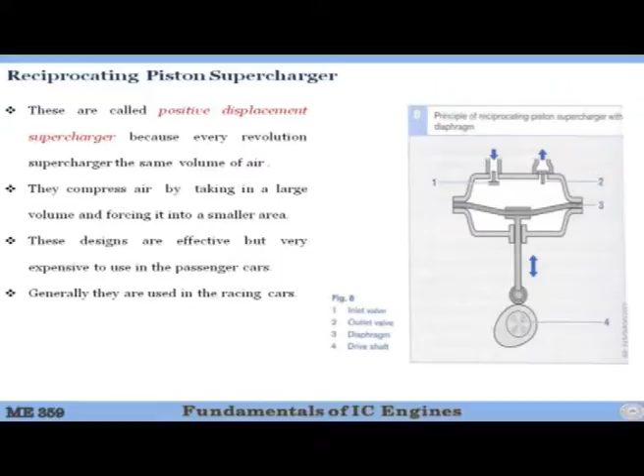Turbocharger or supercharger - then you have the reciprocating piston supercharger. There is a cam, a follower, and a flexible strip which can move up and down. When it moves down, vacuum is created and air comes in, and when it goes up, compression happens, pressure is generated, and this valve opens at a particular pressure and the air goes out.

This is also a positive displacement supercharger, because every revolution supercharges the same volume of air. They compress the air by taking in a large volume and forcing it into a small area.

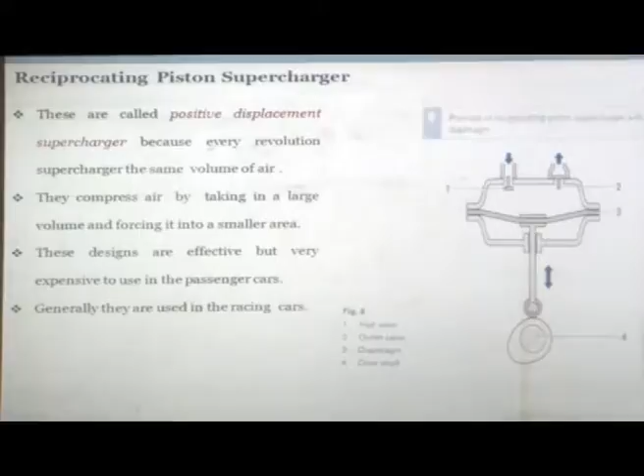These designs are effective but very expensive to use in passenger cars, so this kind of supercharger is generally used in racing cars, because in racing cars you don't worry about cost and you don't worry about life - as long as they last one race, you're okay, and they should do their job properly.

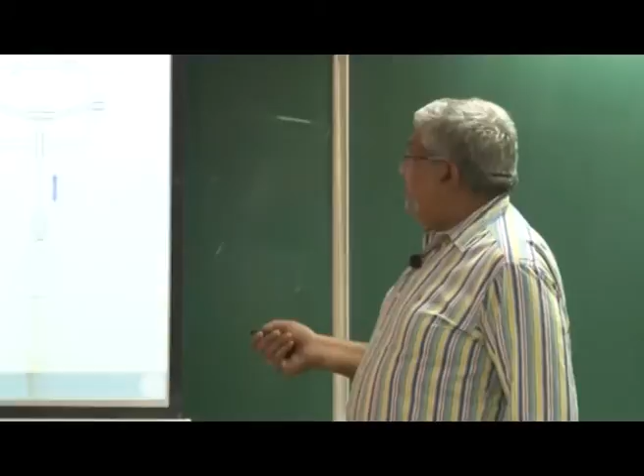But in a car which you want to own, you don't want any component to fail before the entire car fails. You want it to last something like 200-300,000 kilometers, and you don't want components to fail. So this is not a good supercharger for that kind of application, but for racing cars, yes, it's a good option.

The air is admitted at one end of the compressor and trapped between the helical rotors and the casing. The screw action of the rotor displaces the air axially. The Lysholm compressor produces a constant compression, and this compression is produced internally, unlike the Roots blower, where compression only occurs at the exhaust. So in the Roots blower, compression happens only at the opening, but here it is happening internally.

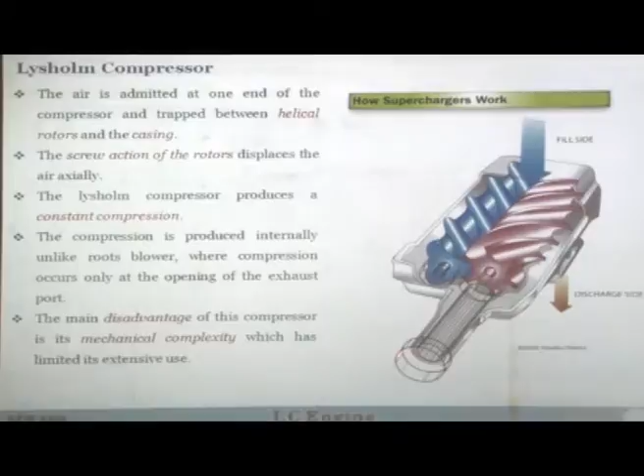The main disadvantage of this compressor is the mechanical complexity - it's not a very simple compressor. Because of the mechanical complexity, it has very limited use and is not used very extensively. Nevertheless, it is also one option available to you if you can handle the complexity.

The idea is that when the air is taken in, this air will be compressed between the outer casing, the inner casing, this vane and this vane. It will not allow leakage.

If the air comes in, right now this inlet port is open. So there is a lot of volume, then it moves and some compression happens, then more compression happens, and when more compression happens, higher pressure will be generated, and this high pressure air will go out, and then expansion starts, and then again you take in more air.

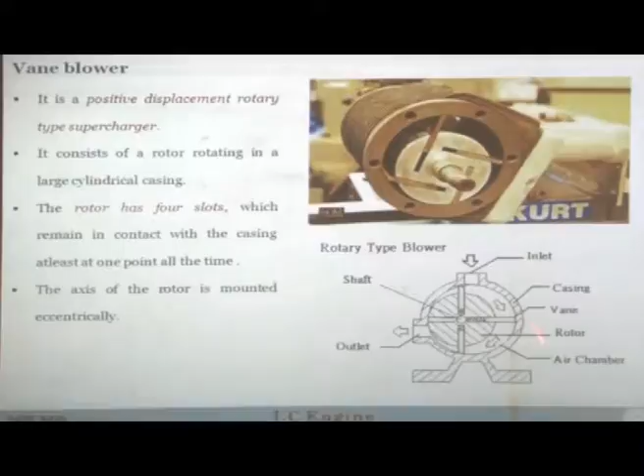So this is also a positive displacement rotary type compressor. It consists of a rotor rotating in a large cylindrical casing, and you can see that the axis of this outer cylinder and this rotor are not the same - it is eccentric. If it were in the center, then it would not do any compression.

The rotor has 4 slots - it is not necessary to have 4, you can have more if you want, but generally it has 4, which remain in contact with the casing at least one point at a time. So this entire length, there will be a line which will maintain contact. The axis of the rotor is mounted eccentrically.

So this is how the rotary type blower, or rotary type supercharger, actually works. This can also be bolted on.

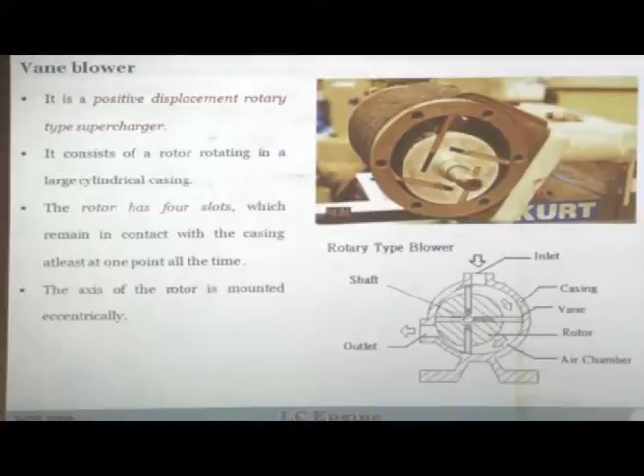The centrifugal compressors run at very high speed. So if you are using a low speed engine and you want a centrifugal compressor, that compressor will be operating at 10 to 15,000 RPM. And if you want a compressor for a high speed engine, you need 15 to 30,000 RPM.

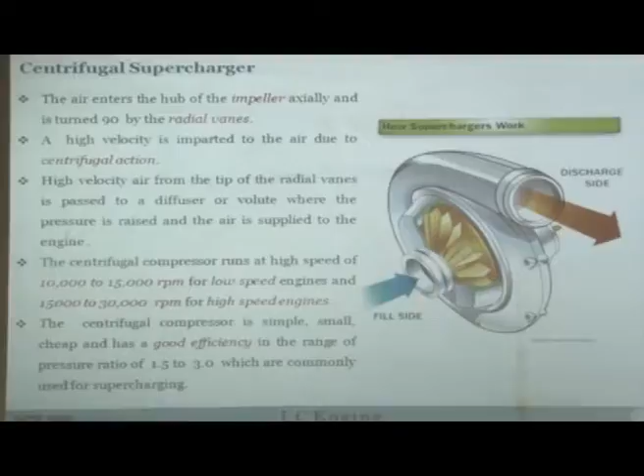Can you tell me what will be the speed of a typical turbocharger, automotive size turbocharger? Close to 1 lakh. That's right. So it could operate anywhere between 50,000 RPM to 2 lakh RPM, depending on what is the load and speed, and depending on how much exhaust gas is flowing through it.

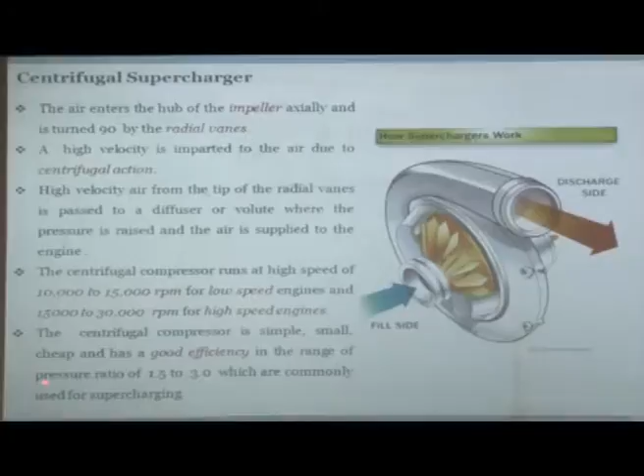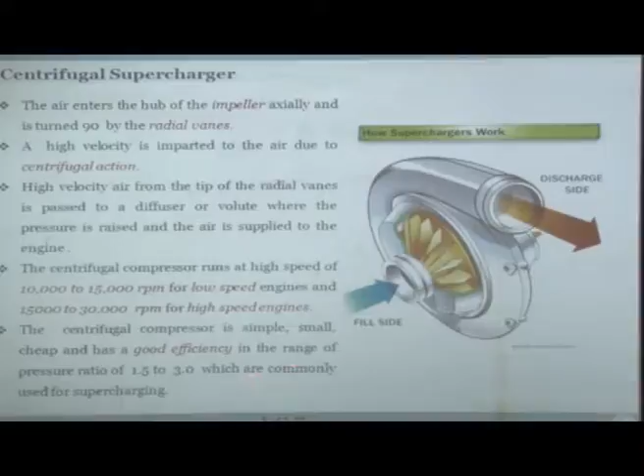So the centrifugal compressor is simple, small, cheap, and has reasonably good efficiency in the range of pressure ratio from 1.5 to 3. Pressure ratio means outlet pressure by inlet pressure, which are commonly used for supercharging. So this is quite suitable.

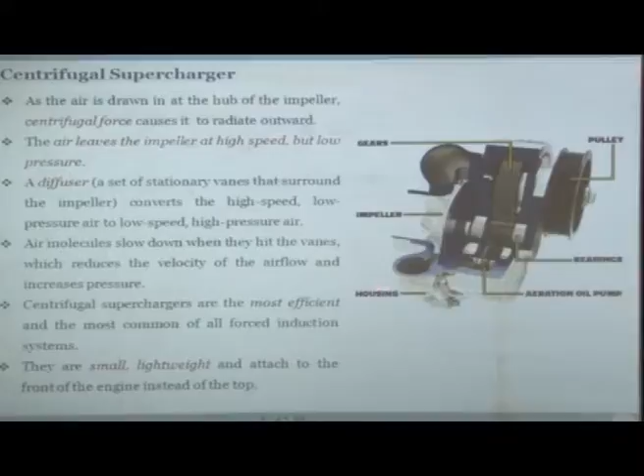So this is how a centrifugal compressor looks like, a centrifugal supercharger looks like. There will be a pulley, which will be connected by a belt drive to the engine crankshaft. Then there will be some gears, because you have to operate it at very high RPM, up to 30,000 RPM. The engine crankshaft will be rotating at 1 to 3,000 RPM maximum, 5,000 RPM.

So the RPM has to be increased, and that is done by this appropriate gearing mechanism. Then there is the impeller, and there is a housing, and then there is lubrication also, because everything needs to be lubricated since it is rotating at a very fast speed.

So the air is drawn into the hub of the impeller by centrifugal forces. The air leaves the impeller at high speeds. The diffuser converts high speed low pressure air into low speed high pressure air. Air molecules slow down when they hit the vanes, which reduces the velocity of the airflow and increases the pressure.

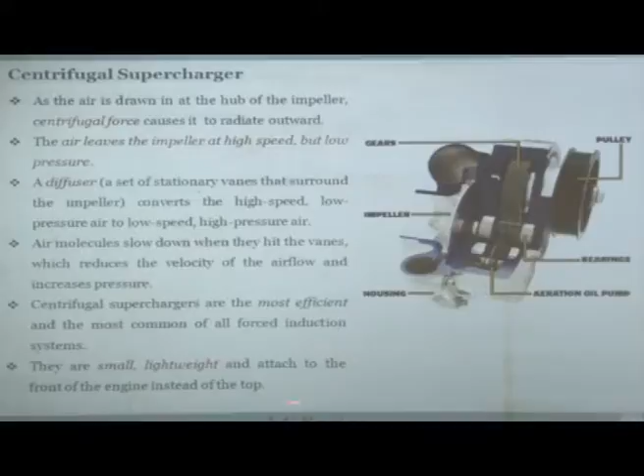Centrifugal superchargers are the most efficient and most commonly used forced induction systems, particularly for engine applications. They are small, lightweight, and attached to the front of the engine instead of on top. So it's very easy to attach on the front of the engine where the crankshaft is. So this is how the centrifugal supercharger works.

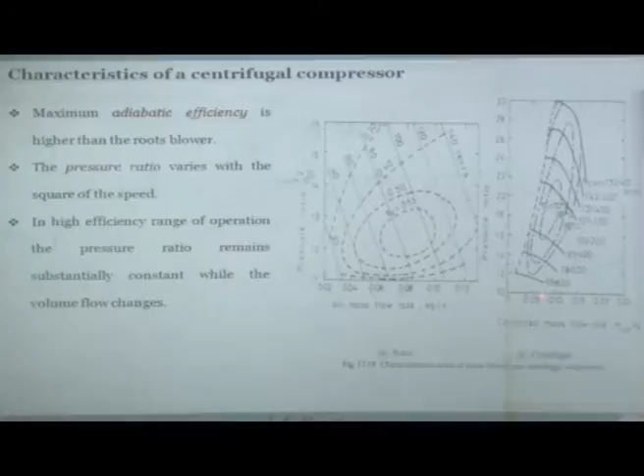So if you are within this envelope, you are at 55% efficiency. Within this envelope, 50%. Larger you go, 40%, 30% and like that. Here this is 80%, 68%, 65%, okay, and these are the speeds and this is the pressure ratio.

So this is exactly opposite to the positive displacement compressor, in which volume flow remains substantially constant, but pressure ratio changes rapidly. This makes centrifugal compressors unattractive for automotive applications. So centrifugal compressors are not very suitable for automotive applications.

The limited speed range of the compressor makes it suitable for constant speed type engines. So centrifugal compressors are more suitable for say genset engines, where speed is not changing, or for aircraft engines. So these are suitable for those applications, but not for variable speed engines, because they don't like frequent changes in the speed.

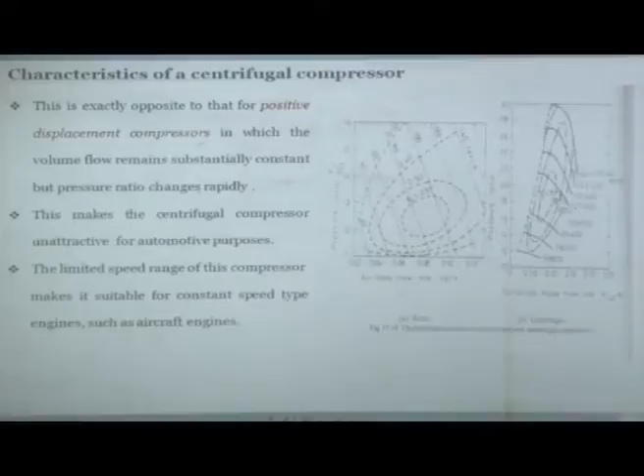Let's look at the effect of supercharging on the performance of the engine. What happens to the power output?

The power output of a supercharged engine is higher than its naturally aspirated counterpart due to the following reasons. First, the amount of air inducted per cycle at a given swept volume increases. So you have more air, so you can put in more amount of fuel.

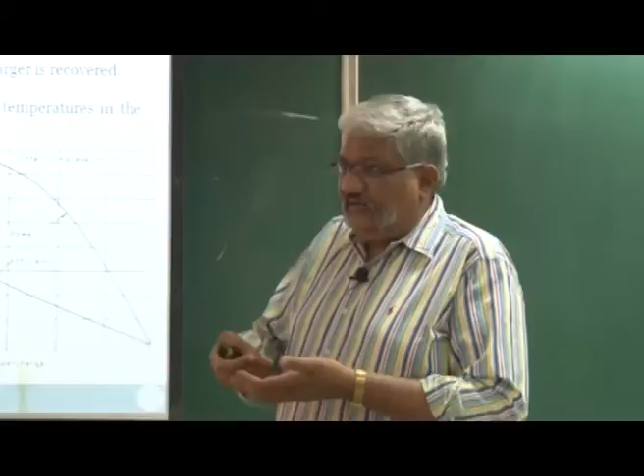Second, during the gas exchange process, some of the work done on the supercharger is recovered. In gas exchange, during the exhaust, the piston is pushing and you have to provide extra power to push the piston, and then exhaust goes out. Now the fresh air comes in and you have to suck it. In the naturally aspirated condition, the piston has to be forced by the power of the engine itself, but when you have a turbocharger, the air is also at a higher pressure, so air will start working during the intake stroke as well. That is why part of the work that you are doing in compression is recovered in the intake stroke, or gas exchange process, as we call it.

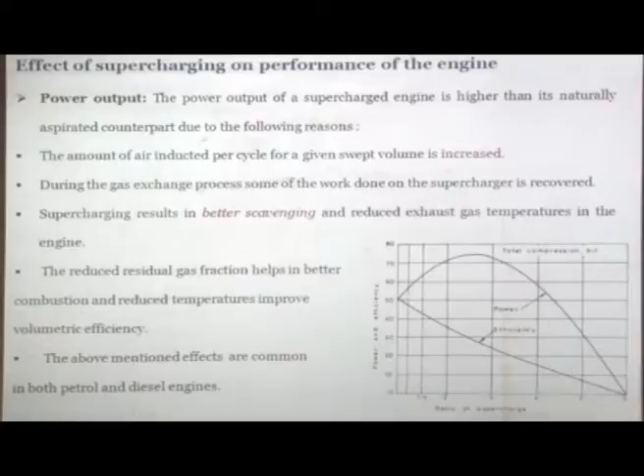Supercharging results in better scavenging. Scavenging is basically forcing out the exhaust by the fresh air when there is valve overlap, which always exists to some degree in the engine. When fresh air is coming at a higher pressure, it will flush out more residual gases, so you will have less residual gases left in the engine, cleaning most of the burned gases. This results in better scavenging, and reduces exhaust gas temperature, because the intake temperature will be lower since most of the hot exhaust gases have been removed from the combustion chamber. Everything cools down better, leading to lower exhaust gas temperature.

The reduced residual gas fraction helps in better combustion. These exhaust gases left at the end of combustion are contaminants that affect combustion adversely. With lower quantity due to increased intake pressure, you get better combustion, reduced temperature, and improved volumetric efficiency, since hot gases have higher volume for the same mass, which reduces volumetric efficiency.

These above mentioned effects are common for both petrol and diesel engines. So power output actually increases with turbocharging.

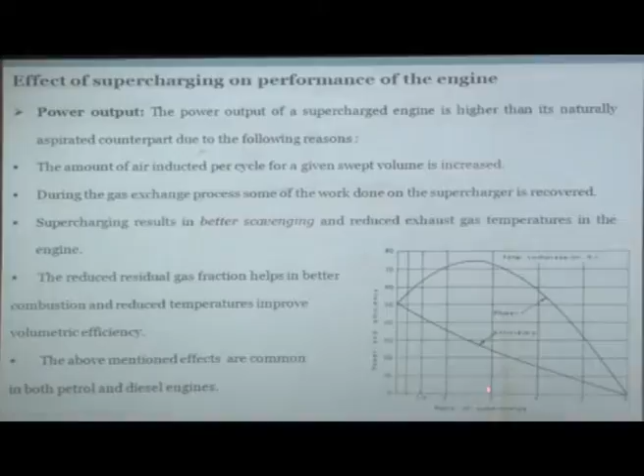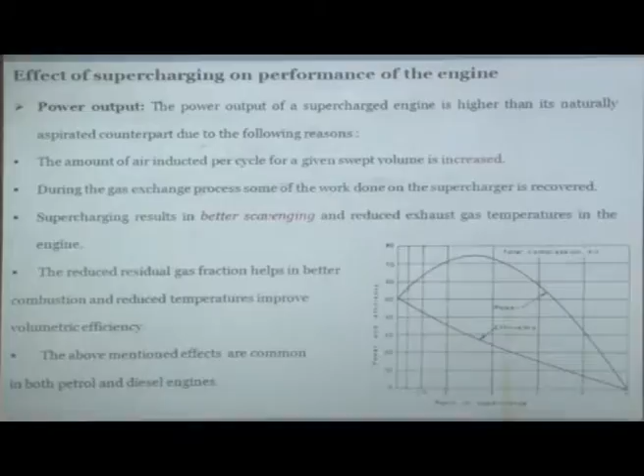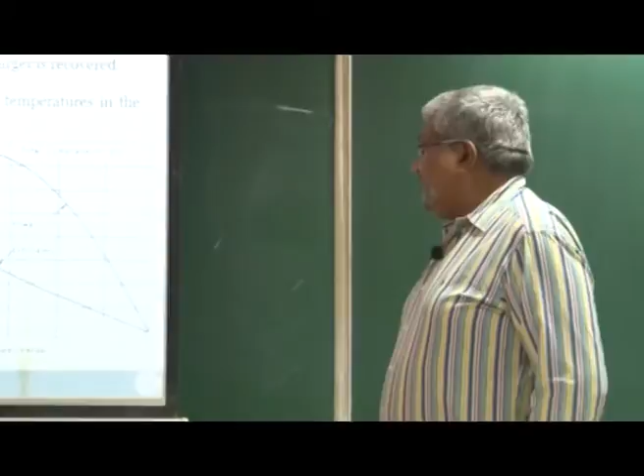You don't go beyond a certain ratio of supercharge - the boosting is never more than 1.5 to 2 bars. Beyond that, it becomes counterproductive. There is a good possibility that if you boost beyond 2 bar, you may end up damaging your engine, because boosting is almost like increasing the effective compression ratio of the engine. This affects the structural integrity of the engine as well, and sometimes there may be a possibility of breaking.

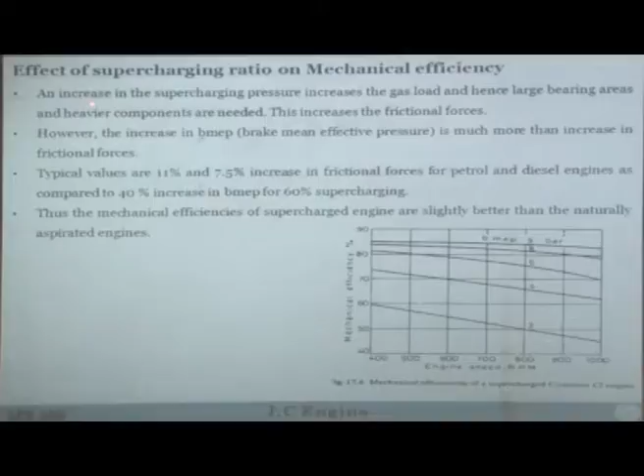What is the effect of supercharging on mechanical efficiency? Increasing supercharging pressure increases the gas load, hence larger bearing area and heavier components are required. When you are boosting the engine, you are putting in more fuel, so the peak firing pressures and rate of heat release will be higher. So everything has to be strong - the piston, the connecting rod, the bearings, the crankshaft - and this also increases the frictional loss.

Therefore, in an unmodified engine, if you do not want to change the piston, connecting rod, or anything, you should know what is your factor of safety.

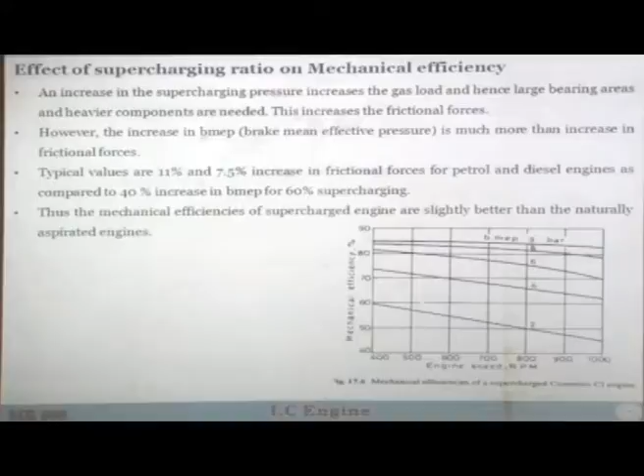In the engine, we take a reasonable factor of safety, and when we boost the engine, we are still within safe limits. But if you boost it beyond a certain level, there is a possibility you may exceed the factor of safety, leading to a warped connecting rod, distorted crankshaft, piston failure, piston disintegration, cylinder disintegration, or snapped head bolts. So many problems can happen if you boost your engine above 2 or 3 bar.

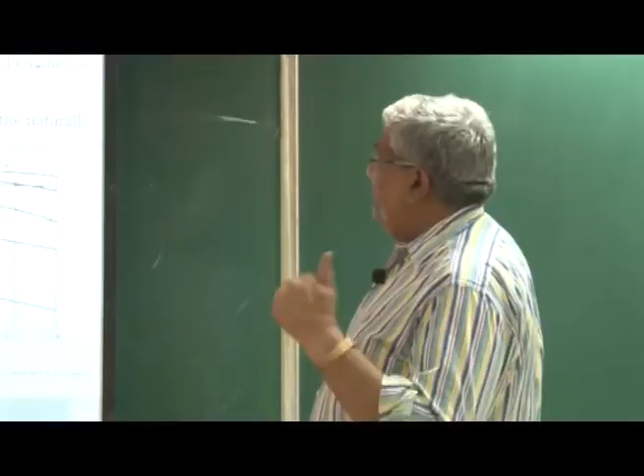This certainly increases frictional loss as well, since the pressure in the cylinder increases. However, the increase in BMEP is much more than the increase in frictional loss. BMEP means the power output is more. So since the power output is more, although frictional loss is increased, since that is what you want, you ignore the loss.

The negative aspect is not overbearing on the positive aspect. The positive aspect is increase in BMEP or increase in power output, so that is quite attractive. Typical values show 11% to 7.5% increase in frictional loss for petrol and diesel engines by boosting, compared to a 40% increase in BMEP. So 40-50% more power you can generate, and frictional forces will increase by only 10-15%.

So the mechanical efficiency of a supercharged engine is slightly better than a naturally aspirated engine. Here this shows engine speed in RPM, mechanical efficiency, and BMEP. You can see that when the BMEP is low, the engine is operating at low load. As you keep increasing the load, your BMEP actually increases, so mechanical efficiency which was between 60% to 45% now increases to 90% to 75%.

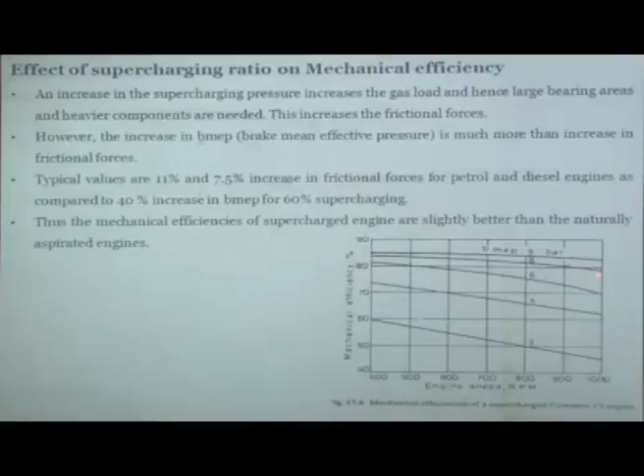So this is all that I have to talk about supercharging. If everything is clear, then we can move on to turbocharging. So let us start turbocharging.

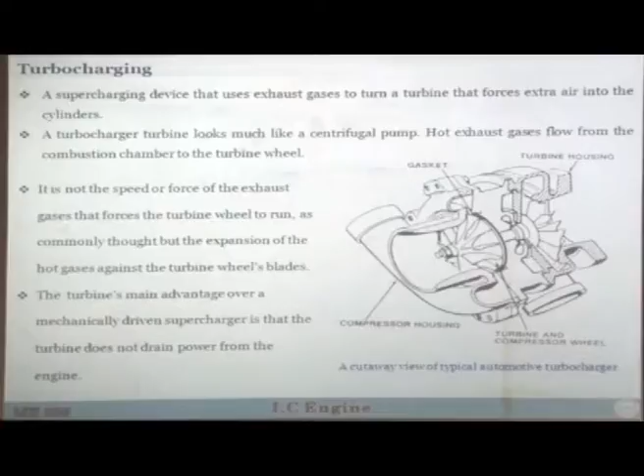Turbocharging is also some kind of supercharging device, but the only difference from supercharging is that it does not draw power from the engine crankshaft, it draws power from the hot exhaust gases. So it is a charging device that uses the exhaust gases to turn the turbine, which forces extra air into the cylinder, into the intake manifold.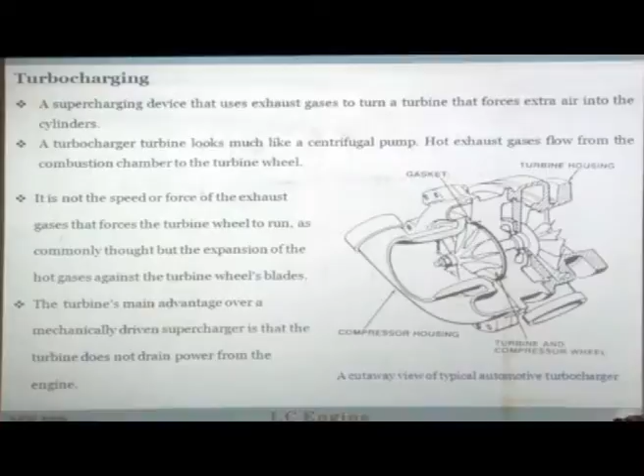A turbocharger turbine looks more like a centrifugal pump. It is just like a centrifugal pump, the only thing is the flow direction is exactly reverse. What does a centrifugal pump do? It takes atmospheric pressure air, uses work to give it kinetic energy, and what comes out is high pressure, high temperature air. Temperature also increases because compression is taking place.

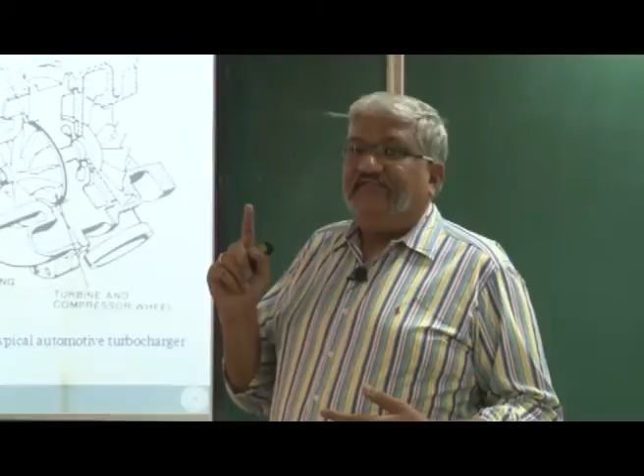A turbine does exactly the opposite. It takes high pressure, high temperature exhaust gas in, generates power, and lets low temperature, low pressure exhaust gas go out. So it's just the reverse. If you look at the mechanical construction also, it is pretty much similar, except the flow directions are opposite of each other.

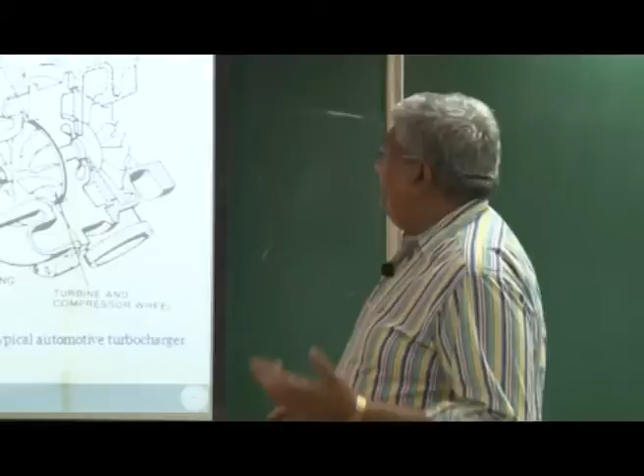A turbocharger looks much like a centrifugal pump; hot exhaust gases flow from the combustion chamber to the turbine. So this is a typical turbocharger. Please see, this is the compressor housing and this is the turbine housing, very compact, and both are connected by a shaft. So when the exhaust gas goes in from here,

it rotates, and first this diffuser will act as a nozzle. So whatever pressure and heat you have, it will increase the velocity of the exhaust gas, and then it passes through this impeller where there is further expansion, and the kinetic energy of the exhaust gases is imparted to the impeller. So the impeller starts rotating and the shaft starts rotating, and this shaft is connected to the compressor, so the compressor impeller also starts rotating, and air goes in from here, fresh air is given kinetic energy, and it goes out at a higher pressure. That is the working mechanism.

So here you have to understand that it is not the speed or force of the exhaust gases, but it is the heat.

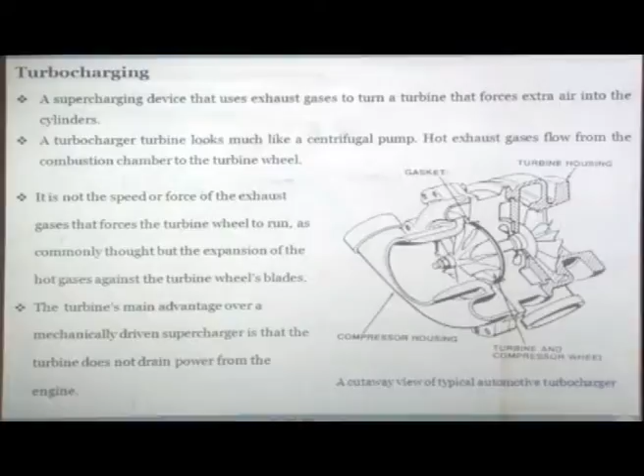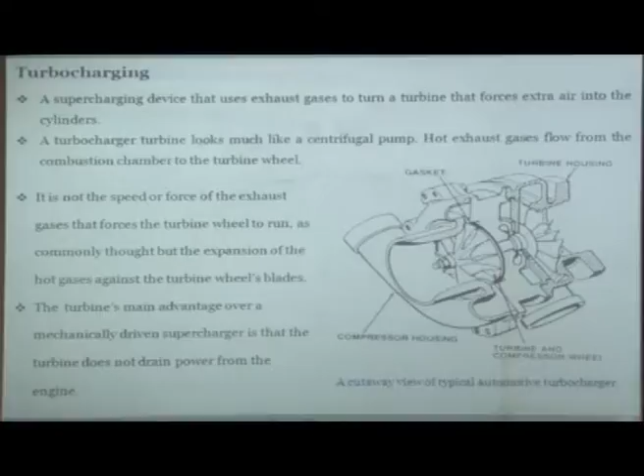Exhaust gases coming out of the engine are hot, their temperature could be as high as 250 to 650, 700 degrees, in case of an SI engine it could be even 800 degrees centigrade. So these are very hot gases, pressure may not be very high. These gases expand in the turbine stage, and the turbine starts rotating. The turbine's main advantage over a mechanically driven supercharger is that it does not drain power output from the shaft of the engine. So it is almost free of cost because exhaust gas was going waste anyway. You have used that energy to run your compressor, so it is a very positive aspect.

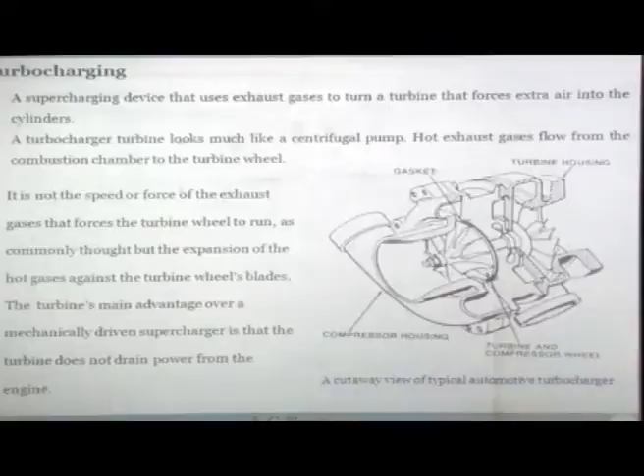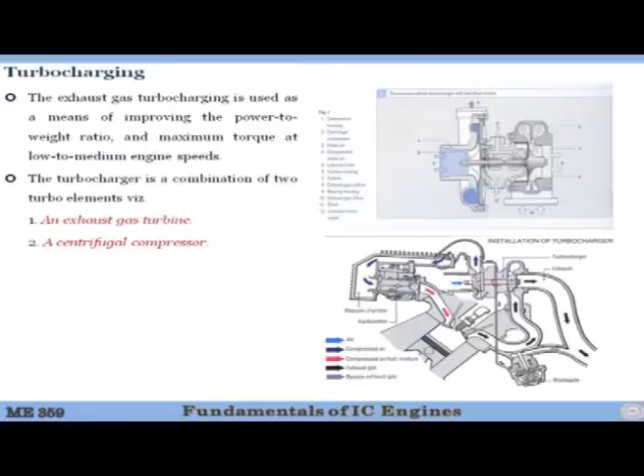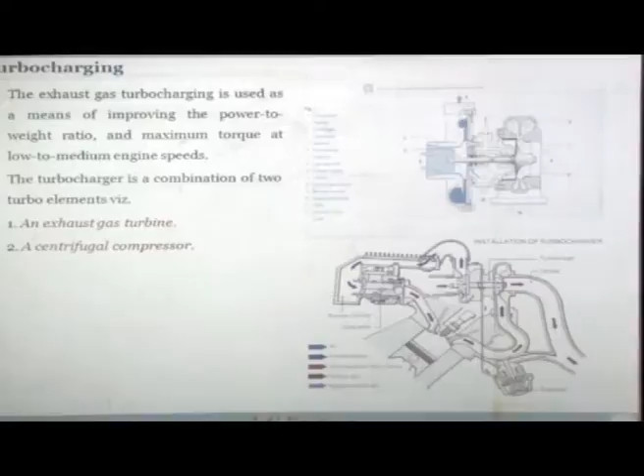So this is again the same cut section, you can see this is the compressor, and here you can see this is the impeller, and these are the diffuser, circular diffuser, and this is the turbine. Exhaust is going in from here, and you can see these are the nozzles, and then the exhaust passes through this component where it delivers its momentum, and then the gases go out, and this starts rotating, which in turn rotates this.

So exhaust gas turbocharging is used as a means of improving the power to weight ratio and maximum torque at low to medium engine speeds, and the turbocharger is a combination of two turbo elements, one is the exhaust gas turbine, the other one is the centrifugal compressor.

This is the installation of a turbocharger on a typical engine, a spark ignition engine as you can see. This is the piston, this is the spark plug, this is the intake air, this is the exhaust gas, and this is the exhaust manifold. Here you have a waste gate, which bypasses some of the exhaust when required, otherwise in normal condition it remains closed. So when it remains closed, all the exhaust passes through this turbine and goes out, and ultimately the waste gate and turbine both exit into the same exhaust pipe.

This starts rotating, and then the intake air is taken in from the atmosphere. Obviously before this point you will have a filter, you do not want particles to enter. So the intake air comes, this is rotating, power is coming from the turbine. Compression happens, and because of the compression, the pressure and temperature both increase. Now when you have high temperature air going into your system, volumetric efficiency will reduce. So you do not want hot air to go in, you would like to cool it so that your volumetric efficiency increases.

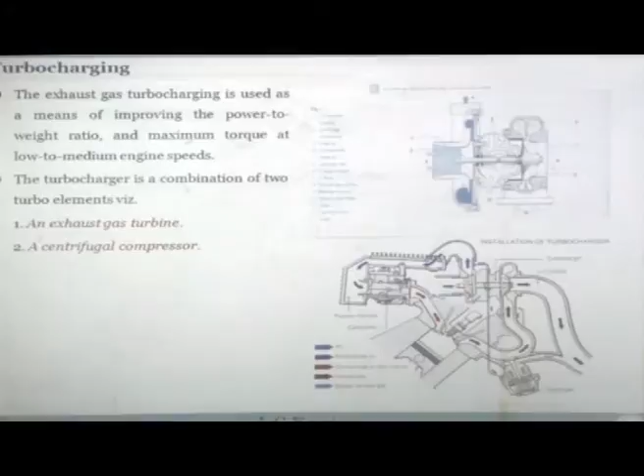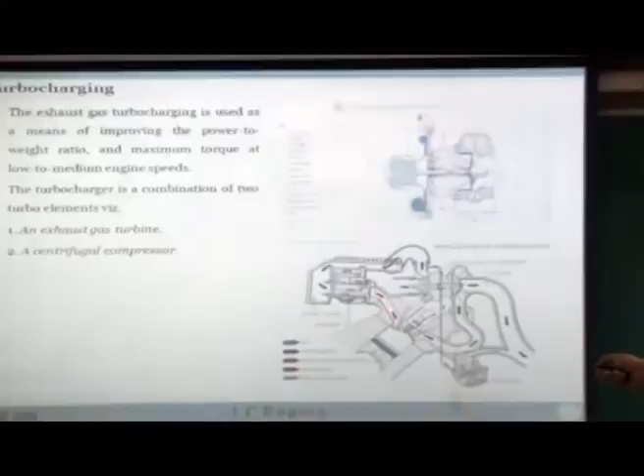So this high pressure, high temperature air passes through some kind of cooling device, an intercooler or some device. You can see some fins here. So this is high pressure, now it is room temperature, high pressure air. Then it passes through a very special type of carburetor, one which can withstand and work in high pressure. Or nowadays nobody uses carburetors, especially for four-wheeler applications, so that thing is gone, and in its place you have a port fuel injector. So that fuel air mixture comes in, and this is how it is installed.

So here's another view, you can see the exhaust gas entering, rotating through the turbine and going out axially, and ambient air entering axially, rotating, and high pressure air going out.

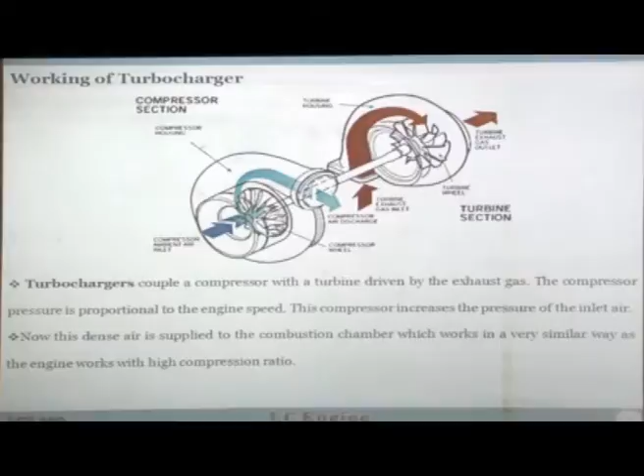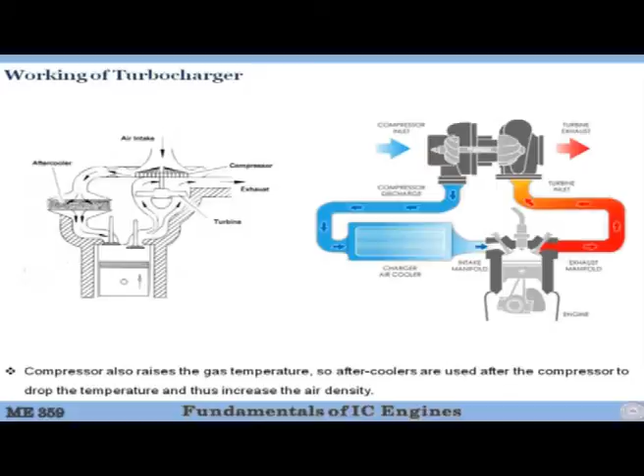So here you take the air in, and then you have to pass it through some kind of charge cooler in order to reduce its temperature. Rest of the things I have already explained to you. The compressor also raises the gas temperature, and therefore an aftercooler or some kind of intercooler is required, basically some kind of heat exchanger where, without changing the pressure, you are removing the heat and cooling the intake air. So after the compressor, to drop the temperature, and this will help increase the density.

Now, if you are using a turbocharger or a supercharger, which one will have a faster response, and why? Obviously the supercharger will have a fast response because it is connected to the crankshaft. The moment you demand, the engine starts rotating fast and boost is provided almost instantaneously because it is bolted on. In a turbocharger, what happens is the engine starts rotating fast, you demand more fuel, but there may not be enough air to begin with, so it tries to catch up. There will be more exhaust which will be hotter, going to the turbine. The turbine starts rotating faster, which then leads to more boost in the compressor, more pressure generation, passing through the intercooler and then coming in.

So for this pressure difference, the pressure wave takes time, there is a circuit. So during this time you are putting more amount of fuel and there is not enough air. So there is a lag in the response, and this creates a big problem. This is called turbo lag.

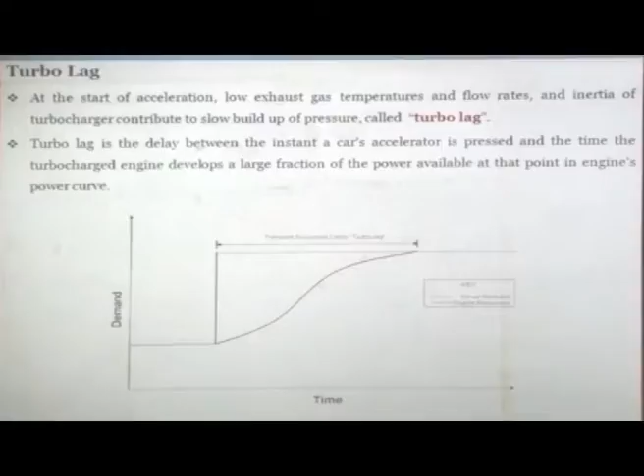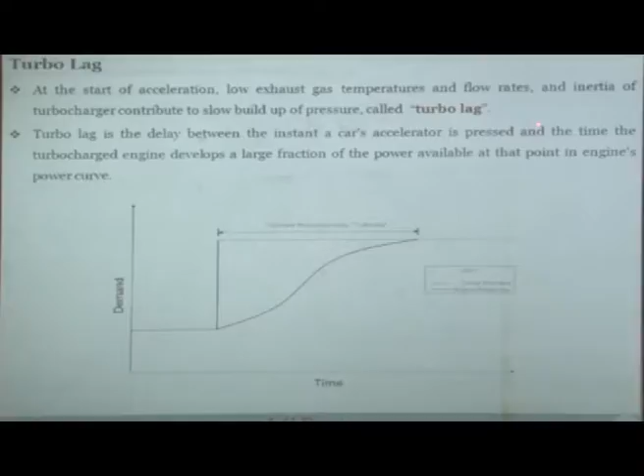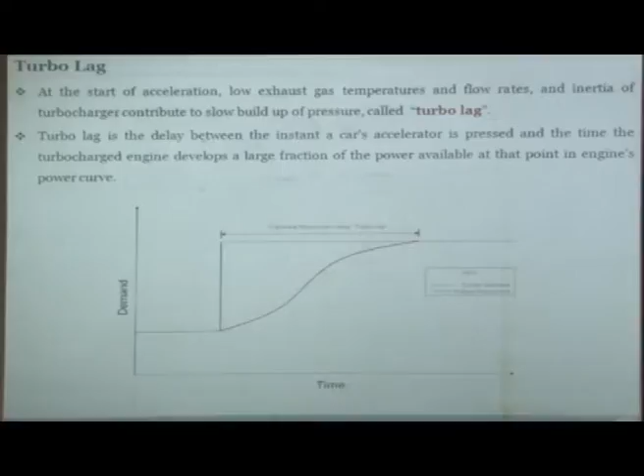As soon as you have more exhaust going, the turbine will take its time to increase its rotational speed and build pressure, and that is what creates this turbo lag. Turbo lag is the delay between the instant a car's accelerator is pressed and the time the turbocharged engine develops a large fraction of the power available at that point on the engine's power curve. So basically turbo lag is nothing but the time delay between the moment the demand is placed and the moment the demand is met by the engine. That is called turbo lag.

I am sure you must have all travelled by train, and I am sure all of you must have noticed that when a diesel engine comes into the platform, and sometimes when it falls short and the driver tries to put the pedal, you see a large black smoke plume rising from the locomotive and you feel how bad it is. Have you seen that scenario? Most of the time it happens.

Why does it happen? Because of the turbo lag. And the moment the driver keeps on pressing, in 20-30 seconds that plume vanishes. After that it is just clean. It is because of the turbo lag.

That's the time when, suppose the locomotive driver pulls the notch, that means he starts giving more amount of fuel. So there is not enough air, and the hot gases also take time to reach the turbine. The turbine takes its own sweet time to accelerate and increase its rotational speed, and then again the intake air has to be supplied back to the engine. All this circuit is 20-30 seconds in a locomotive, and this is called turbo lag, because even the turbine and compressor have their own inertia. So it is just one example.

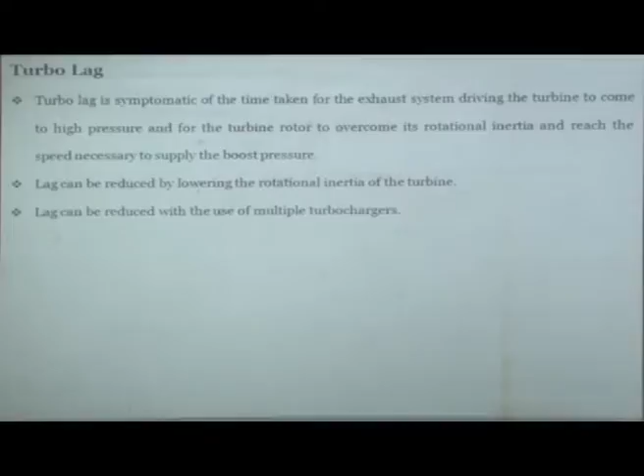It does not happen in case of a supercharged engine. Turbo lag is symptomatic of the time taken by the exhaust system driving the turbine to come to high pressure and for the turbine rotor to overcome its rotational inertia and reach the speed necessary to supply the boost pressure. This lag can be reduced by lowering the rotational inertia of the system. So how can you handle this?

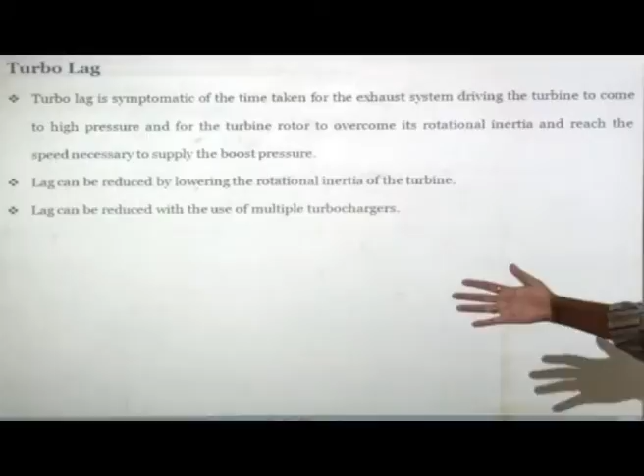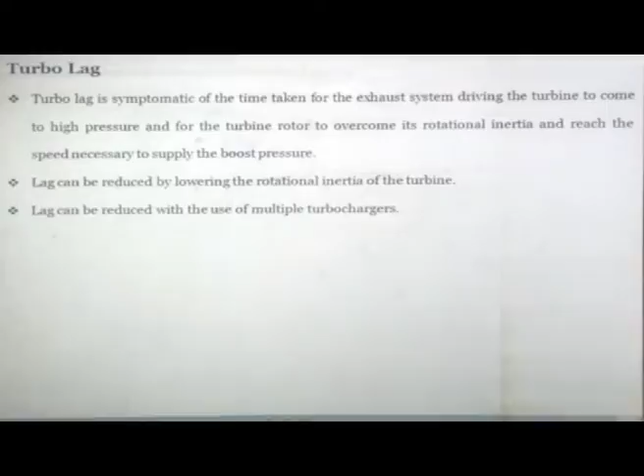Simple thing, instead of having such a big turbine, you have two smaller turbines. The lower mass you have, the lower will be the inertia. So you can have low inertia turbines, more number of them. So this lag can be reduced by use of multiple turbochargers. But multiple turbochargers also have their own problems, because earlier you had to maintain only one turbocharger, now you have to maintain two. So nothing is free, everything has some flip side.

Now let us look at overloading of the engine by the turbocharger. So you see we have defined the boost, and boost is the pressure above the atmospheric pressure that is coming out of the compressor. Now under some conditions you may not require very high boost. Boost will depend on the engine's operating condition. In some conditions you may require 0.2 bar boost, in some conditions 0.4 bar boost, in some conditions 0.6 bar boost.

So since you need variable boost, you need some mechanism by which you can control it effectively. So the process of controlling the maximum boost pressure of a turbocharger is known as boost control. The question comes, why is boost control essential, why is it required. First, boosting essentially means increasing the effective compression ratio of the engine. Now remember, in the context of spark ignition engines, if you have high compression ratio, what can happen? Knocking can happen. So higher compression of fuel air mixture may lead to knocking in SI engines.

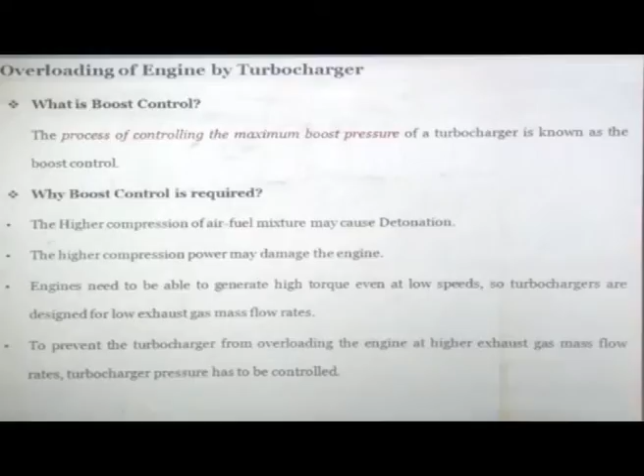Now, there are two things: a turbine and a compressor, connected by one shaft. Your objective is that the compressor boost should be reduced. So what are your options? One option is that the exhaust gas coming in, I allow some exhaust gas not to pass through the turbine, I bypass it. The other option is I allow all the exhaust to pass through it, let it rotate at whatever speed it is rotating, let the compressor generate all the pressure it has, and then I do not allow all the pressure to go into my intake. I allow only what is required, and send the rest back to the atmosphere. And this I can do for a diesel engine. If I am compressing air fuel mixture, I cannot do that in case of an SI engine, right.

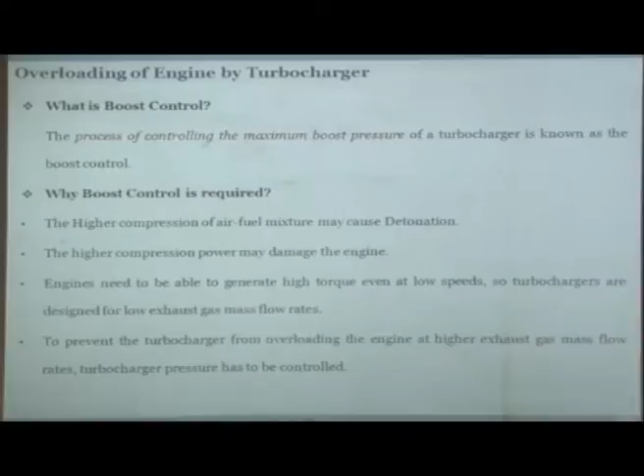On a very high level, these are the two main options you have, and for these you have some devices that you can use for boost control. Boost control is extremely important. Without boost control, there is no point in having a turbocharged system in an engine.

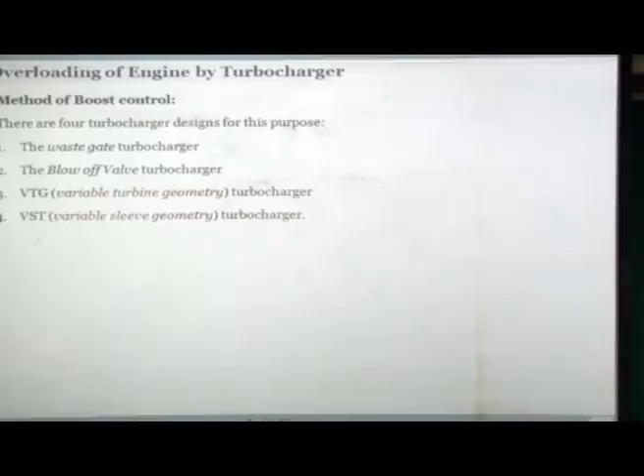4 turbocharger designs are used for this purpose, or 4 devices could be used for this purpose. One is the wastegate turbocharger, I will tell you what the wastegate is, I mentioned earlier also that there is a wastegate. Then there is a blow off valve turbocharger. And there is variable turbine geometry and variable sleeve geometry, VTG and VST turbochargers. Out of these, first 3 are most important.

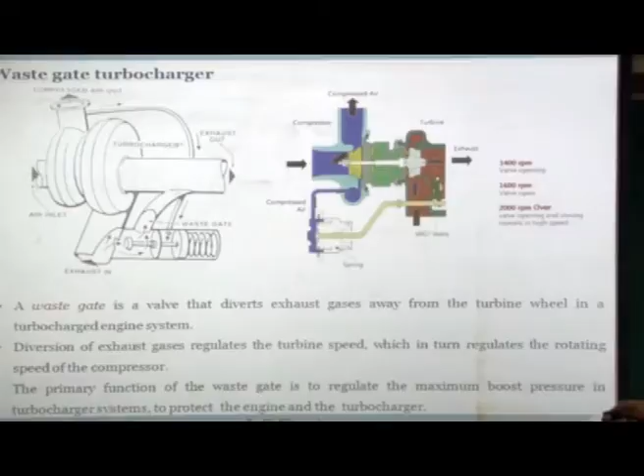What is a wastegate turbocharger? This is the compressor and this is the turbine. What the wastegate does is that it bypasses some of the exhaust. This is the entry of the exhaust gas. It bypasses some of the exhaust and puts it in the exhaust pipe, so it does not allow all the exhaust to pass through the turbine. Since it does not allow all the exhaust to pass through the turbine, the turbine speed will reduce, and therefore your boost will also reduce, or you can control it. And how do you achieve that? Basically this is the wastegate, a very interesting, very simple system. There is a spring here, and there is a pipe connected from the outlet of the compressor to here. Suppose this boost increases beyond a certain level, so the pressure here will increase beyond a certain level. This disc is fixed, so when the pressure here increases, then what will happen?

This piston will move to this side, and when it moves, this hole will be uncovered. The exhaust gas would like to pass through the path of least resistance, and there is resistance in the turbine, so it bypasses through this hole. Depending on how much the hole is open, that much exhaust gas will bypass. If the pressure is too high, the gate will open more and more. The moment the turbocharger speed reduces, boost will also reduce, so the pressure will reduce, and the spring will push it back and close it. This is an automatic system, isn't it smart? That is how it works.

This is another example, same wastegate, just a different cross section, more of a schematic cut section. Air is coming in through the compressor. From here a line is taken, with a spring and some mechanism - this is the wastegate. When the pressure is high, you open this device, and part of the exhaust bypasses - you can see the arrows showing the exhaust being bypassed. When the pressure falls, the turbine speed reduces, the compressor speed reduces, and this pressure falls, so this closes, and more of the exhaust passes through the turbine.

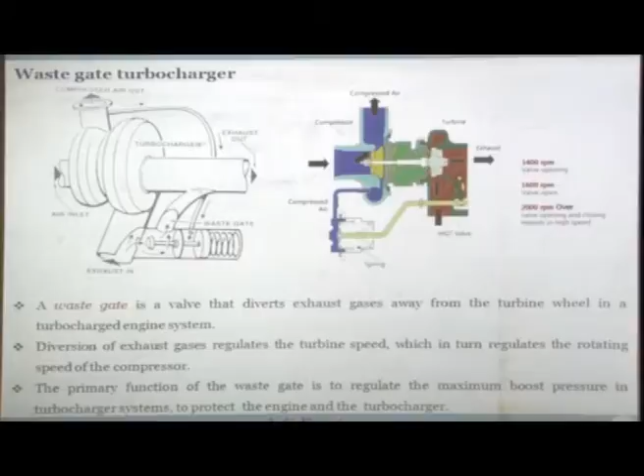At higher engine speeds or load, part of the exhaust gas is diverted by a bypass valve called the wastegate, shown here. This is the compressor, this is the turbine, and this is the valve. The moment it experiences higher pressure here, this valve opens and part of the exhaust gases go out, reducing exhaust gas passing through the turbine and lowering the exhaust back pressure, preventing excessive turbocharger speed. At low engine speeds and loads, the wastegate closes and the entire exhaust gas passes through and drives the turbine, generating sufficient boost. At high speeds, it opens and some exhaust is bypassed so that boost is controlled. That is how it works.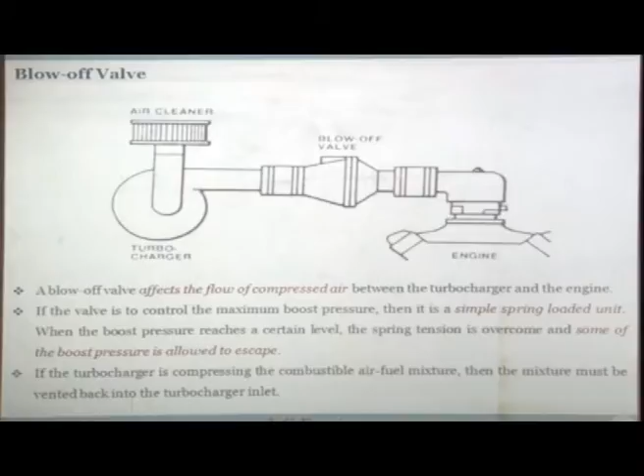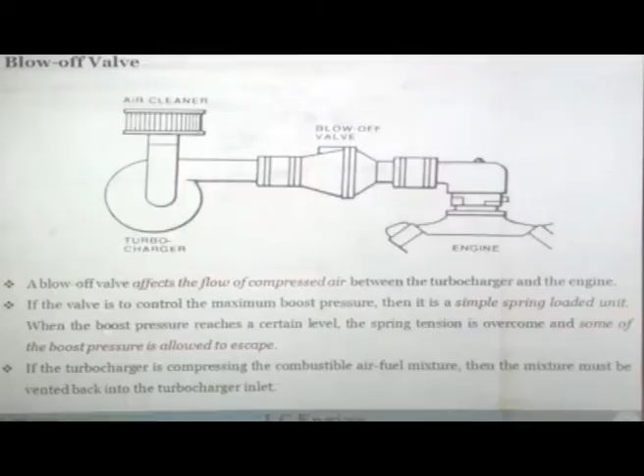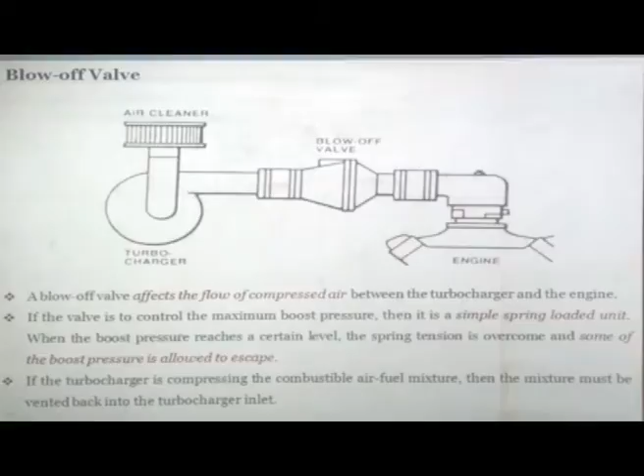If the valve is to control the maximum boost pressure, it's a simple spring loaded unit. When the boost pressure reaches a certain level, the spring tension is overcome and some boost pressure is allowed to escape. If the turbocharger is compressing a combustible mixture - suppose you have a carburetor and are compressing a fuel-air mixture - you can't allow this to vent into the atmosphere, so you have to put it back into the intake. If compressing a combustible air-fuel mixture, the mixture must be vented back into the inlet of the turbocharger - you have to make sure of that. If it's just a diesel engine, or just compressing air, you don't care to take that air back - it's free of cost. But if it's carrying fuel along with it, then it's not free, you have to plow it back into the system. So, this is how a typical blow off valve looks.

So, blow off valve, also called diverter or bypass valve, all work by detecting vacuum. Having done so, they use vacuum to mechanically open a valve in order to relieve unnecessary boost from the other side of the throttle plate. This is common in high performance applications where it provides the least compromise. They basically release the pressure straight into the atmosphere.

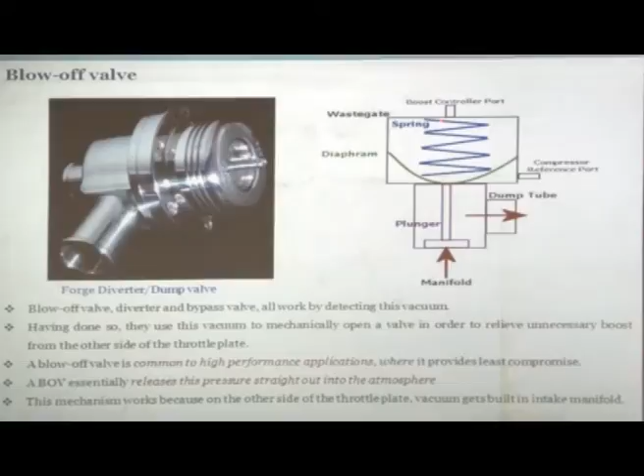This mechanism works because only on the other side of the throttle plate does vacuum get built up in the intake manifold. So there is a spring, a diaphragm, and a plunger, and this is connected to the manifold. Whenever the manifold pressure is high, this plunger is lifted against the force of the spring, and then it goes to the dump tube into the atmosphere.

All right, this is the last thing I want to talk about today, the variable geometry turbocharger. Variable geometry turbocharger technology is the next generation turbocharger technology. The other two are older generation and have been used for a very long time. VGT is a new technology where the turbo uses variable vanes to control the exhaust flow against the turbine blades. I will explain what this is.

So, a turbocharger equipped with VTG, variable turbine geometry, has little movable vanes which you can control to change the direction of the exhaust gas flow onto the turbine blades. The vane angles are actuated by actuators, and the angle of the vane varies throughout the engine RPM range to optimize the turbocharger behavior.

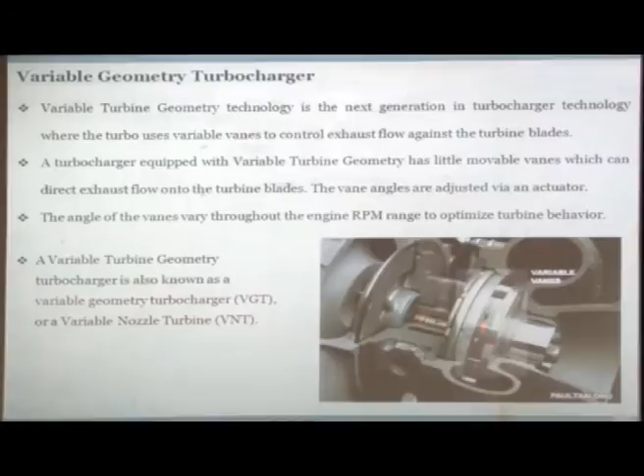At different speeds and load conditions, the boost requirement is different, and this can be tackled by this technology. A variable turbine geometry turbocharger is known as variable geometry turbocharger or variable nozzle turbine, and this is how it looks. You can see these little vanes which can change their angle. I will explain what this is.

So these are the vanes actually, and here are two figures. Figure A is the deflector blade setting for high turbocharger pressure. Whenever the turbocharger pressure is high, you make them straight, so the air has to go through, and the angle of attack is different, so now the rotational speed of the turbine will be reduced.

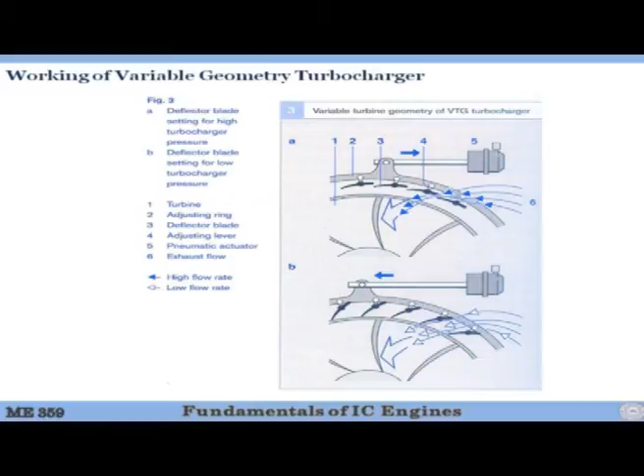So the boost will be lower, and when the flow rate is less, at that time you want more boost. So you adjust it such that the angle of attack is at 90 degrees to the blades, that is when they transfer maximum momentum. In this first condition it is not 90 degrees, the relative angle of attack is less, and therefore the rotational speed of the turbine will be lower. In this condition it is 90 degrees.

So the deflector blade setting for low pressure is like this: air comes in and attacks it at 90 degrees, and it will generate more boost, clear?

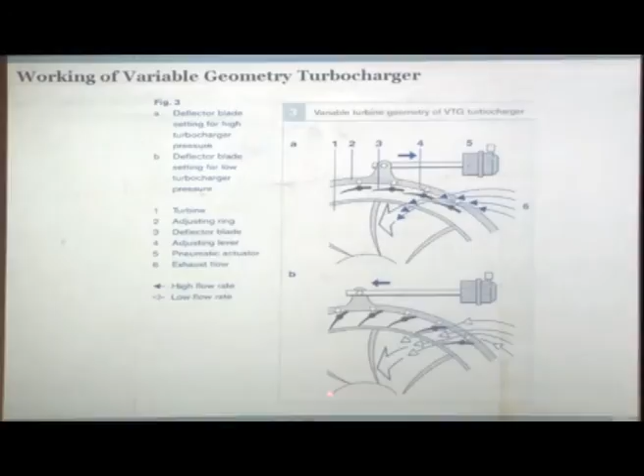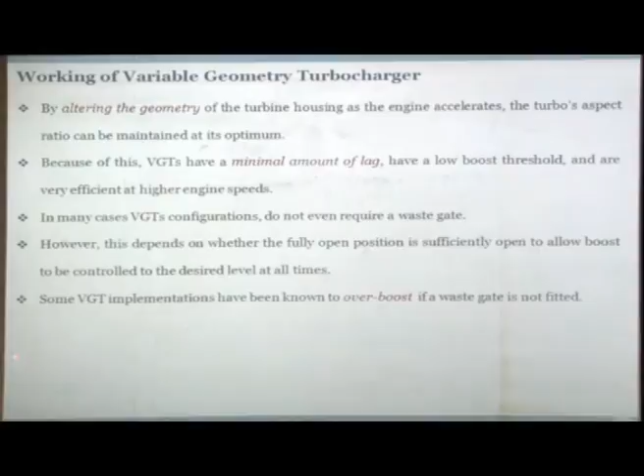By altering the geometry of the turbine housing as the engine accelerates, the turbo's aspect ratio can be maintained at its optimum. Because of this, VGT has a minimum amount of lag, a low boost threshold, and is very efficient at higher engine speeds. In many cases, VGT configurations do not even require the safety of a wastegate. However, this depends on whether the fully open position is sufficiently open to allow boost to be controlled at desired levels at all times. Some VGT implementations have been known to overboost if a wastegate is not fitted, so it is essential that even with VGT, you include a wastegate.

This has two operational modes: one at low speeds, the other at high speeds. At low speeds, vanes are partly closed, accelerating the exhaust gas flow. Exhaust gas hits the turbine at a right angle, making the turbine spin faster, and the narrow passage through which the exhaust gas flows accelerates it towards the turbine blades, making them spin faster. The angle of the vanes also directs the gas to hit the blade at the proper angle, generating a very high level of boost.

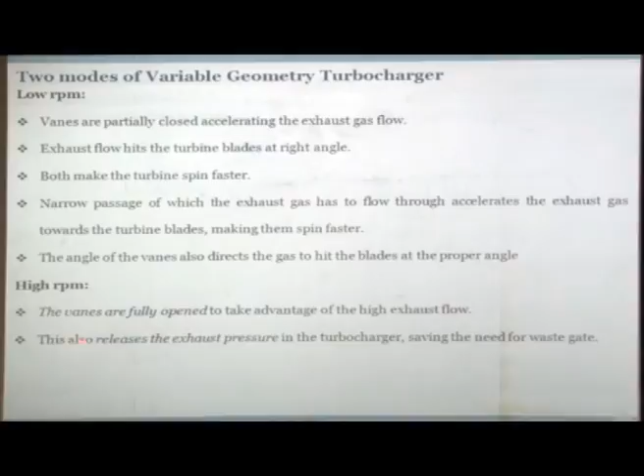At high speeds, vanes are fully open to take advantage of high exhaust flow, and they also release exhaust pressure in the turbocharger, saving the need for a wastegate.